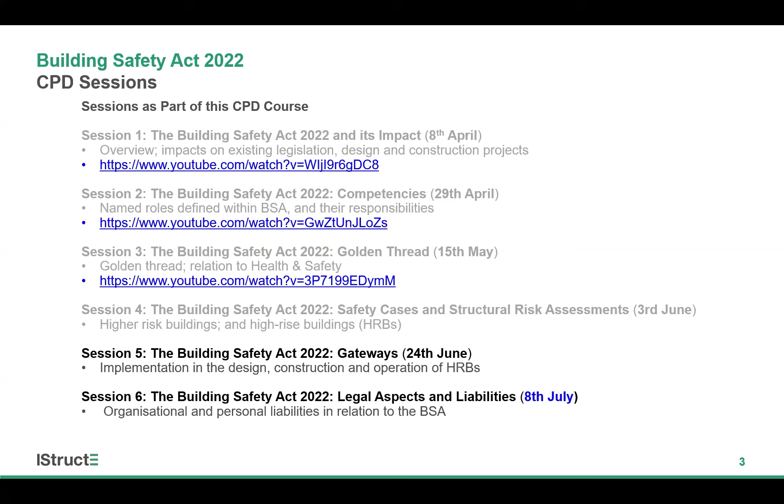Good afternoon. I hope everyone can hear me. Okay, so I'm actually standing in for Chris O'Regan. So you might have come under false pretenses. And I'm also going to thank my colleague, Mats Syversen, because actually this is his presentation that we've delivered to

the Eastern regions. So this is session 5 of your series of CPDs on the Building Safety Act. And we're going to be talking about gateways. We're also going to talk about Gateway 2 and Gateway 3 specifically.

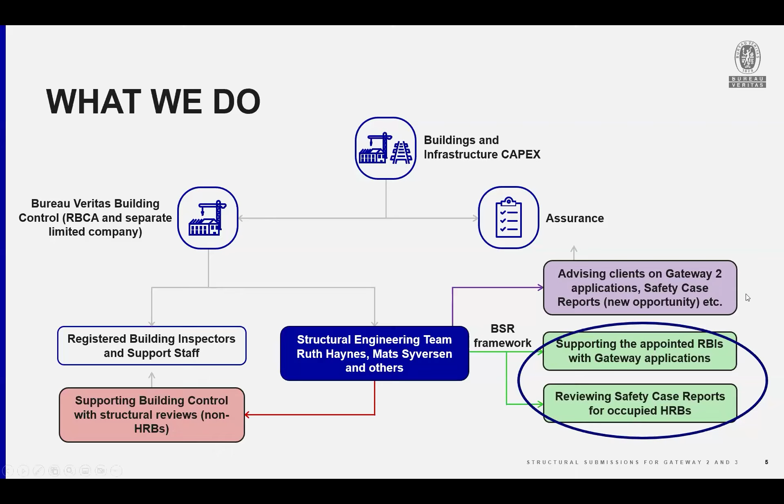So what we do at Bureau Veritas Building Control is we do our own building control. We are a registered building control approver, because of course not all buildings are higher risk buildings. We also advise people on how they might get through a Gateway 2 application. But key to our role, and this is one of the reasons why we're speaking today, is that we are in the framework with the Building Safety Regulator. So we check a lot of projects that have been submitted to the Building Safety Regulator for a Gateway 2 application. So we have quite a bit of experience in how the process is working and what we find out during our checking procedure.

Okay, so I'm going to start with the statutory framework. Of course, we all know that there's a Building Safety Act 2022, and this is probably the most significant change to the regime in the UK of recent years. And I think it's becoming increasingly evident that a change of regime was required. So the Building Safety Act enabled the creation of the Building Safety Regulator, which I'll refer to as the BSR. And the Building Safety Regulator has taken over the function of building control for higher risk buildings.

So a higher risk building is a building that's at least 18 metres in height or at least 7 storeys and contains at least 2 residential units or is a care home or a hospital. There's a bit of a caveat at the end of this slide because there's another stage in the life of a building, which we as engineers often forget about, and that's the in-occupation stage, when people actually live in these buildings. So there are slightly different rules around different types of buildings, whether they're in the process of being built, completed, or whether they're in occupation.

And I'm not going to go into the detail of this in this talk. But I would like to say a bit about why we concentrate on residential when it comes to the Building Safety Act. And I think it's because, well, I know it's because a building that contains lots of different households is not really a managed building. You could potentially have 50 different families doing 50 different activities in the privacy of their own homes.

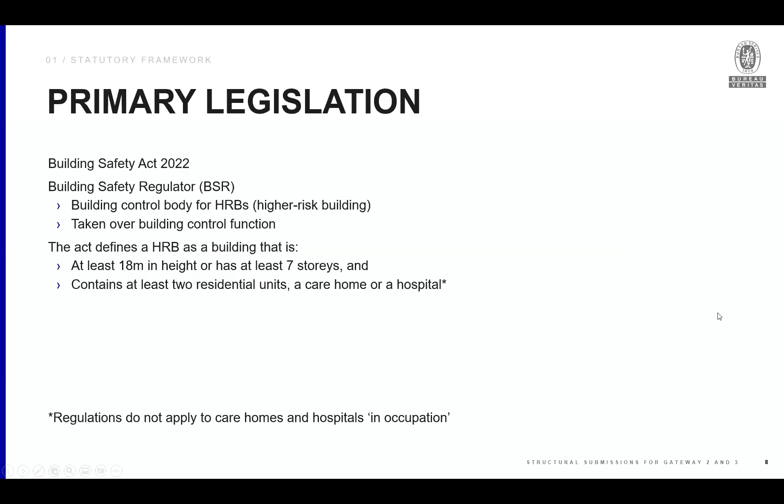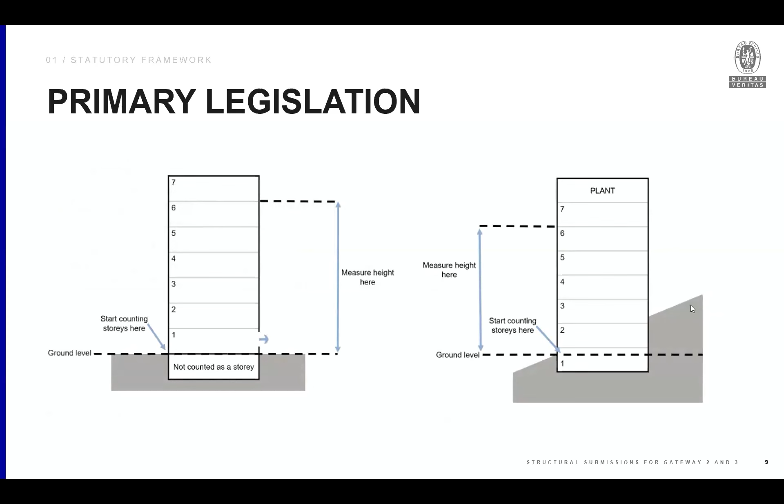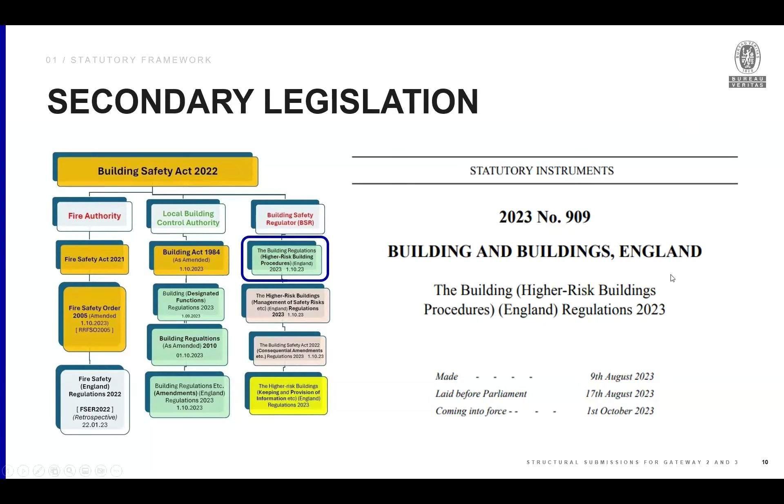Okay, just a few slides to remind us what a higher risk building is. So actually not actually that tall. Of course, we have the Building Safety Act, but under the Building Safety Act sits lots of secondary legislation. And it's this statute, the Building (Higher-Risk Buildings Procedures) (England) Regulations, that sets out how we do building control.

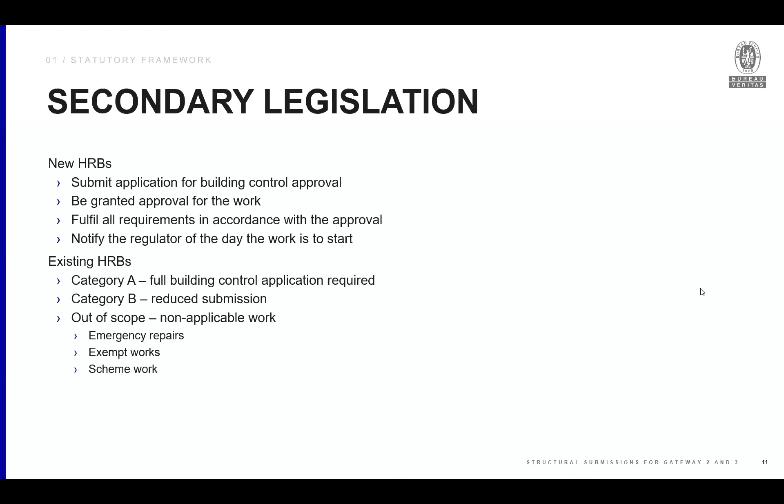So with a new higher risk building, as an engineer, you'll be contributing towards the submission for building control approval to the building safety regulator, who will then grant approval for that work. And then, of course, you then notify the regulator the day that you would start work, and during the process of being built, there will be inspections by structural engineers or fire officers or registered building inspectors. But of course, not all HRBs are brand new. Many HRBs are existing buildings, and this Act also covers work to existing higher risk buildings.

So let's talk about the gateway process. So the gateways roughly align with what we're used to in terms of planning building projects in the UK. So Gateway 1 is effectively prior to planning permission, where applicants will demonstrate that their planning application records thinking on fire safety. Gateway 2, this is prior to construction, and these are the submissions that we're currently looking at. A Gateway 2 application is you provide your design information to the regulator for approval, and you cannot start on site until you've got approval for your scheme.

This is quite a significant change to UK construction, because we are used to sort of designing as we build, and people are being caught out by this. And you will see on LinkedIn quite a lot of frustrated people. But the intention is, and you won't get through the gateway otherwise, that you provide a full design package demonstrating compliance with the building regulations.

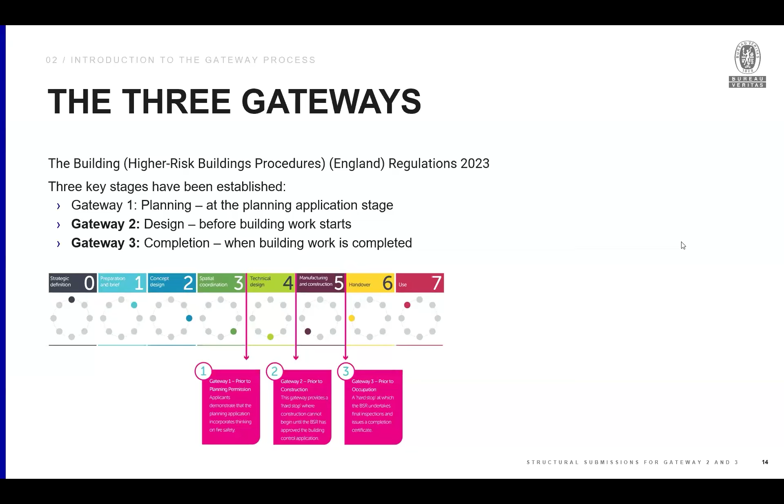And then Gateway 3 is prior to occupation. This is another hard stop in the process. And once the BSR are happy, you'll get a completion certificate. So this isn't dissimilar to building control historically and building control for non-HRBs, in that buildings cannot be occupied until there's a completion certificate.

Of course, we're possibly coming out of the end of this to some extent, but there's always a transitional period between old legislation and new legislation. So there are works, higher risk buildings that were started on site and were sufficiently progressed that they were allowed to continue under the old regime. Other projects that hadn't progressed as much or hadn't been notified to a building control were handed across to the building safety regulator to act as building control.

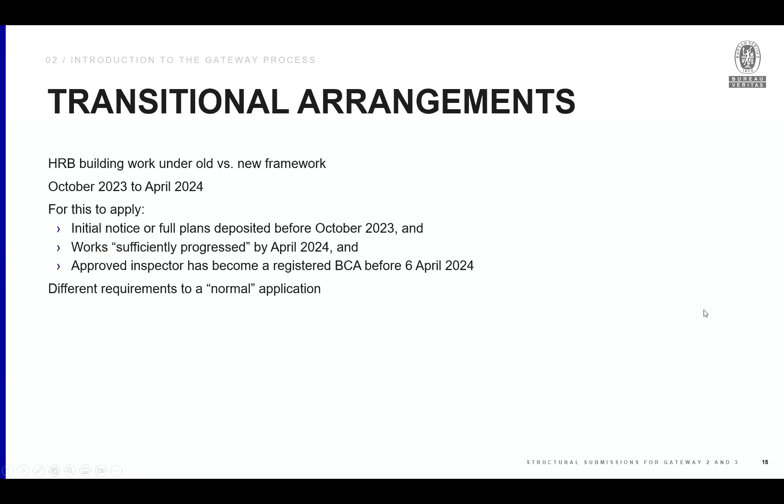So there are buildings out there, higher risk buildings, that are currently being built and are still with the original building control providers, or there's buildings that have switched from the original provider to the building safety regulator. Now, of course, not all building design goes entirely smoothly, and there's often changes. So once you have your Gateway 2 permission, if anything changes that's considered a major change or a minor change, one notifies the building safety regulator.

Because we're sort of at the beginning stage of this process, we haven't been dealing with many major changes because quite a lot of the projects that we have been reviewing for the regulator haven't started on site. Now, what hasn't quite been tested is what a major change means. The statement, a change to the structural design or structural loading of the building, does cover an awful lot of things.

Interestingly, the one major change I've looked at was a beam going into an existing higher risk building, and the contractor wanted to splice that beam to get it in, and that was considered a major change. So that's just something to bear in mind. That's an example of quite a simple project. It was a wall being removed in a higher risk building. Contractor wanted to splice it, and it had to go back through the regulator as a major change.

So possibly design engineers should be thinking about the questions that might be asked and how structural works and alterations are actually progressed so that they can design in things like this. Obviously, anything that counts as a change accumulates time in the construction period because it has to go back through the regulator.

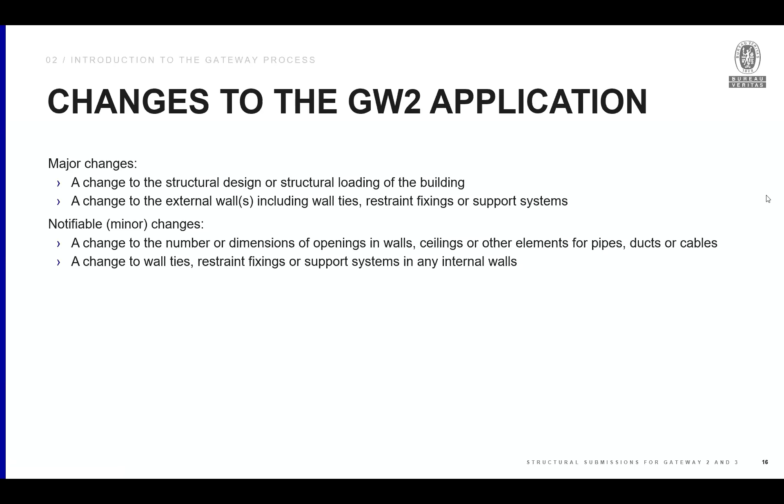Okay, so let's talk about submission requirements and recommendations. So this is a list of the expectations for Gateway 2. So you're expected to provide plans, a competence declaration, so that's a bit new to many people, a construction control plan, which is how you intend to build your building, a change control plan, how you're going to deal with change on site, a mandatory occurrence reporting plan, and a building regulations compliance statement, where you tell the regulator how this building complies with the building regulations. A fire and emergency file. There might be occasions when a partial completion strategy is applicable, and also if a staged work strategy is applicable.

So I'm just going to talk about staging a bit. What we mean in the world of the regulator by a staged project is not staging information. It's if a project really is so large that the construction will be staged. So an example of this might be a very large development with a big podium where multiple towers are going up and the construction period is many years. That could be counted as staging. What we don't mean is staged information. So one day we'll submit some part information, another week we might submit some drawings, another week you might submit calculations. This discussion of staging applies to very large projects.

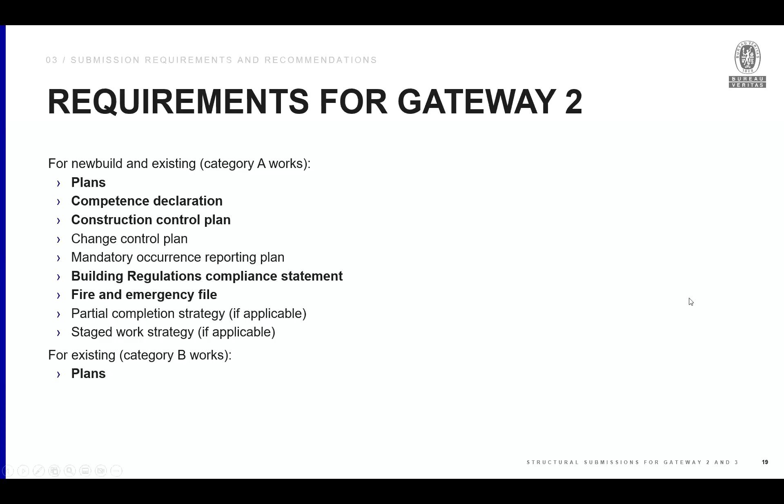So the Gateway 2 application is the beginning of creating the golden thread for this project. And what we know historically is that often we don't know very much about existing buildings, whether HRBs or not. But the Building Safety Regulator and the Building Act wants people to have a golden thread for a building so that people understand how the building was built and what was then done to the building at a later stage. So if a building is 20, 30, 40 years old, there are no mysteries as to what has happened.

So the submission to the Building Safety Regulator, if you're a structural engineer, would include your structural drawings, your reinforced concrete design intent drawings. So note what we say, they're design intent drawings, so not reinforcement drawings. Steelwork design intent drawings with connection forces. And there might be some typical and special detail checks that you want to provide as well, if there's anything unusual going on. The actual reinforcement drawings and steelwork drawings, fabrication drawings, and detailed connection design would be expected at Gateway 3. And what we mean by a design intent drawing is more than an output from software. It is the old-fashioned style design intent drawing that someone can do the detailing for and that a checking engineer can interpret. And then, of course, you'd expect to see the specifications with that package.

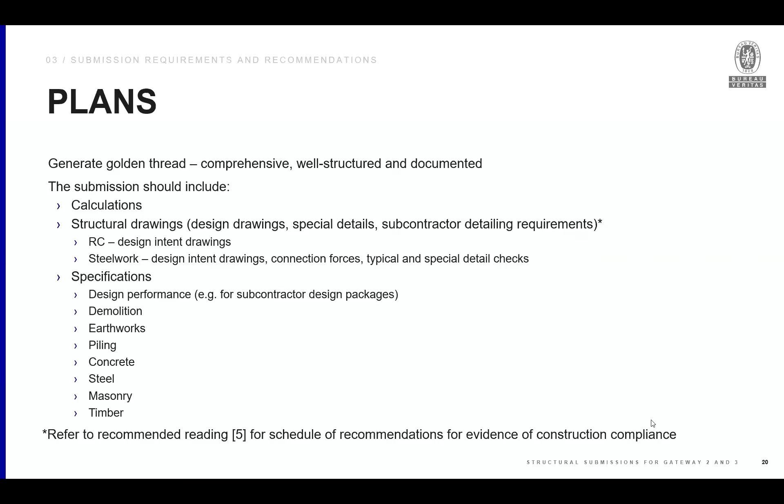We've made a note at the end of this slide to read some guidance on what should be included in a Gateway 2 and 3 application. And this reference 5 is actually the IStructE guidance. So right at the end of this presentation, we'll have all our references up. So there is guidance out there for people to follow.

Okay, so the competence declaration would also go into a Gateway 2 package of information. And this is where you as a design team should be stating your competence. As most of you are probably aware, there is a new register for structural engineers who work on higher risk buildings. And the register is a joint register with the IStructE and the ICE. And this register, at the moment, is not a compulsory register, but it's a way of demonstrating that you have competence. And you can apply for this register now. It was launched about a month ago.

And you demonstrate competence to go on this register by demonstrating how you have attributes that demonstrate that you can work with the competencies set out in the Engineering Council's Structural Discipline Annex for higher risk buildings. So that is one way of demonstrating competence. Of course, another way of demonstrating competence is to be competent.

And as someone who checks lots of design, we can judge an element of competency from a package of information. So if there was a disconnect between someone being on the register, for example, and preparing a poor package, we would have a few questions. The construction control plan is also a new part of a building control submission to the Building Safety Regulator. And structural engineers should be contributing to the construction control plan.

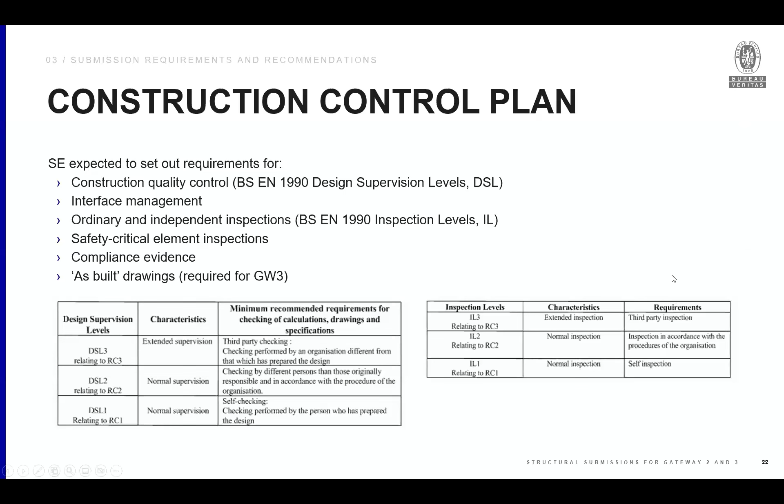So the building regulations compliance statement: there's lots of building regulations and there's lots of approved documents. And as a structural engineer, it's Approved Document A that we are mostly worried about, and also Approved Document B, fire. But A is relatively simple. We have A1, A2, and A3. How does the structure support loading? How do we transfer the load to the ground? And how do we avoid disproportionate collapse? So we would expect to see the compliance statement address how those issues are being dealt with.

And the statement obviously needs evidence, and that evidence would be in the form of calculations. So you might make statements as to how you're demonstrating compliance, and then you might point the Building Safety Regulator in the direction of where they would find that compliance, i.e. which drawings, which calculations, etc.

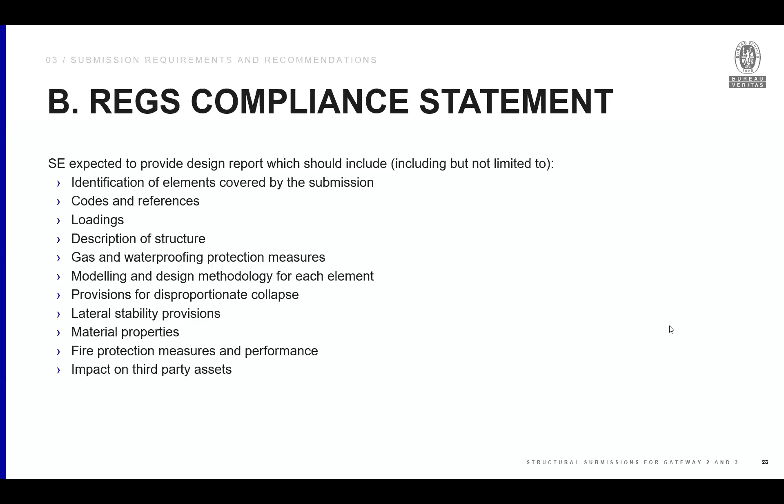And then the fire and emergency file, again, it's another new thing that wouldn't have been in a traditional building control application. But the fire and emergency file is another thing that needs to be submitted to the regulator. And as a structural engineer, your contribution would be to do with robustness, because fire is an accidental load, and a description of the fire protection measures. And it might be something that you work up with the fire engineer. But fire and structure are intertwined, and we need to be aware of Part B, even if we're a structural engineer.

So in the building control world, we talk about Cat B and Cat A works. Of course, high risk buildings have multiple households. Often the building is set up as a freehold with multiple leaseholders, and sometimes the buildings are tenanted, or sometimes a leaseholder is renting out their flat to a tenant. But category B basically means works that are happening to a residential unit within a building, and category A is works that are communal, effectively.

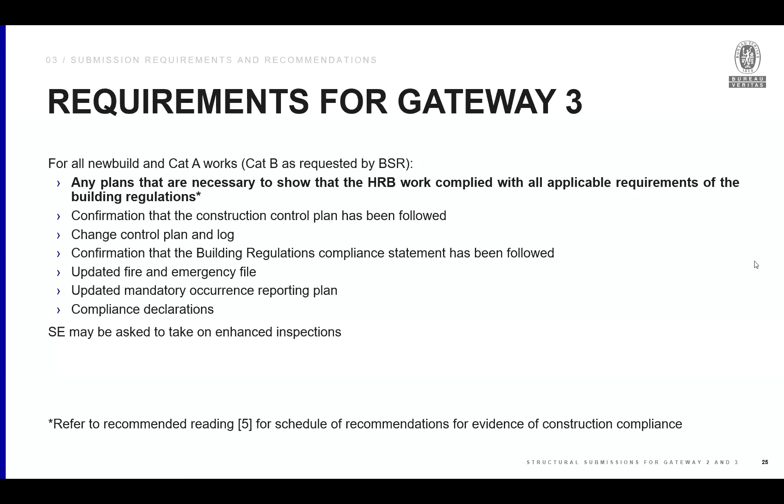Many of the works that are going on with category A at the moment are recladding works. People are removing the flammable cladding and replacing it with non-flammable cladding, and of course that involves a building control application to the Building Safety Regulator.

Okay, you're probably aware from the press that there are many projects that are not getting through the regulator. In fact, there was stuff on LinkedIn over the last few days. We're going to talk about some of the reasons projects are being rejected. This is based on our own knowledge and a few freedom of information requests that there have been. And this will be useful to inform your design. Okay, so this is a summary. So this data is from a few months ago.

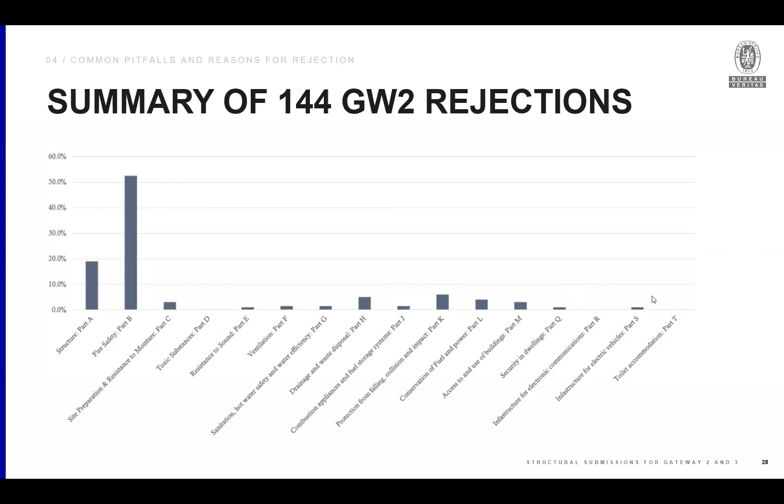And if you've been on LinkedIn recently, you'll realise that there's more summaries out there from yesterday. But at the time of putting this slide together, there had been 144 Gateway 2 rejections. And you can see that just less than 20% were because of structure and just over 50% were because of fire. The numbers might be higher, of course, for structure, because sometimes a rejection went out on one thing before, say, the structure had been reviewed. But you can see that fire and structure are absolutely key to a successful Gateway 2 application.

So if we break it down a bit, and again, this is from those 144 projects. So the reason for the rejections on structure, 30%, was because of structural calculations. 7% was because of pile design. And that's something that I've experienced, that the pile design wasn't provided. Now, of course, we're very used to, in the past regime, the pile design being done once a piling contractor had been appointed. But that isn't how we work now. The pile design needs to be done before the Gateway 2 application.

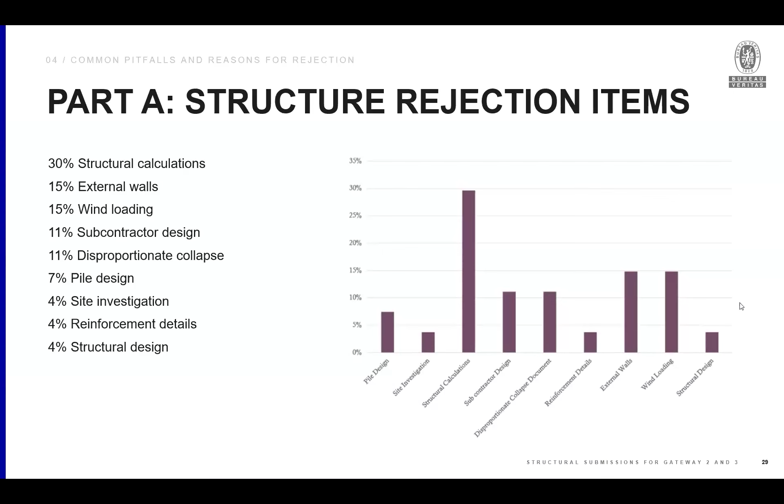So delving into these reasons a bit more, often for the structural calculations, there were insufficient calculations to demonstrate design to Eurocode requirements. I mean, insufficient can mean a number of things. Of course, it can mean incorrect or just absent. We often do see things that are incorrect when we check design information.

External walls is an interesting one. Again, if you're a consulting engineer, often you're used to designing the facade at a later stage. But again, for Gateway 2, the expectation is that the facade is designed when you make that application, whether it's masonry with an SFS inner skin or curtain walling. That design needs to be in place before the Gateway 2 submission. Quite often we see a bit of brick design, but often not the SFS inner skin, because again, that person hasn't been appointed.

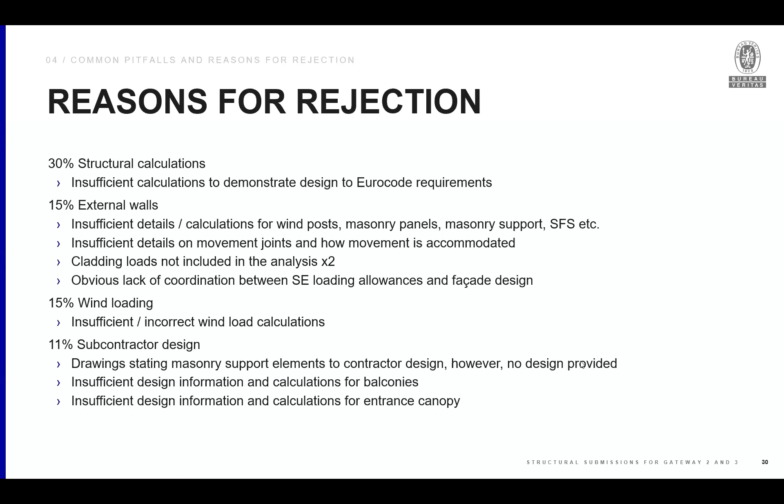Another reason for rejection is there's an expectation that the subcontractor will design various bits and pieces. And again, that is likely to be the case, but the point is that that subcontractor design needs to be on board before Gateway 2 approval is given.

Okay, keeping going on reasons for rejection, 11% disproportionate collapse, often contradictory statements. We quite often see the consequence class of a building changing throughout a set of calculations, or statements that there's key elements, but then we don't see that the key element has actually been designed. One thing I pick up on quite frequently is that people often forget to calculate their tie forces and demonstrate that either reinforcement or connections, if it's steel framed, have capacity for those tie forces.

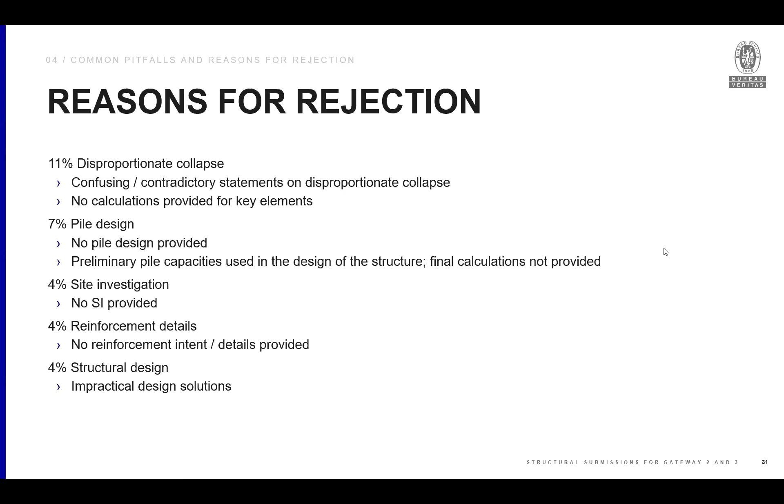I've covered the pile design. It is expected that a pile design is provided. I can see one of the questions is, is a preliminary pile design sufficient? Well, you could submit that. That's better than nothing. But of course, if it's preliminary and it changes, then that's a major change. You'd be going back to the regulator. So we would suggest that you might not want to put in a preliminary pile design.

Again, another question on could you submit a preliminary design? You can always submit a preliminary design, but if you change anything, you'll have to go back and request a change, which will slow down the process.

Okay, so some easy wins on putting together a good package. If, of course, a package of information is easy for the checker to read, it makes it a lot easier for a project to be checked. So I would encourage people to present their calculations such that they're readable. A good introduction, a good contents page, a good index, and tell a story. Tell a story about how this works.